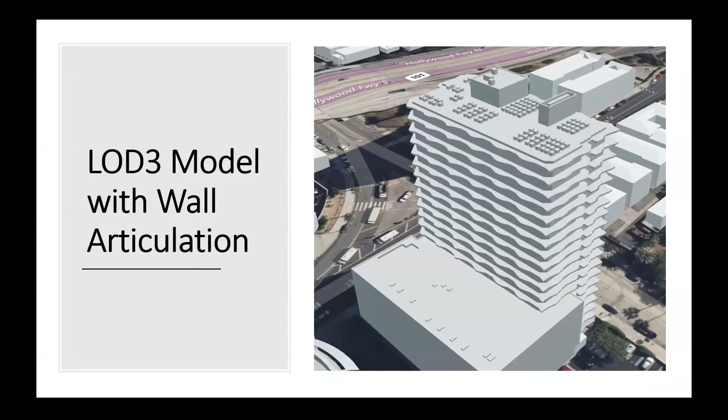These are the buildings with walls articulated, greater information, more detail, more ability to utilize those in more detailed scenes.

And then, of course, the 3.5s, which are textured buildings with computer matching image skins, as well as real photographs of the actual billboards and, in this case, the business information on the buildings themselves. And I just talked a little bit about the oblique image capture and 3D modeling, which you saw.

And then, of course, LOD 4s, where you reminded me that I wasn't really showing anything. Those are LOD 4 buildings. This is the Salesforce building. Just lots of materials, lots of polygons, definitely streamable over the web, but you got to watch what you're doing when you're bringing this many files into a web browser environment. You have to optimize the buildings. That's what we do with NextSpace software. And this is a great example of context and an actual building itself.

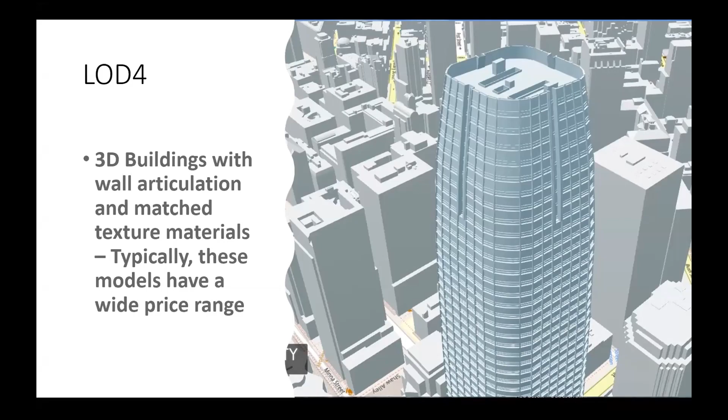Finally, I'll show a building with interior modeling, which is a project we're currently working on, where you can actually go inside the buildings and interact. Mark Thomas is available now to give a little presentation, and he'll take you inside the buildings with the NextSpace software solution, showing some really good examples. This is really where developers get to benefit, because they get to bring their data into a digital twin platform, not only on the web, but also on rendering apps like Unreal, Omniverse, and Unity.

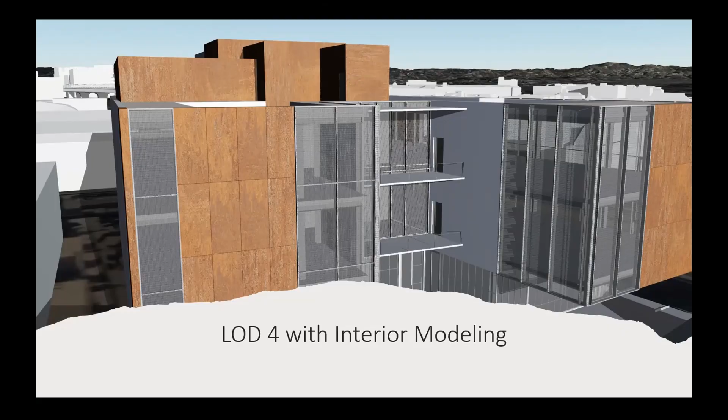Quick summary: LOD 2.5s mainly for 3D mapping and simulations. LOD 3s are untextured but have wall articulation, more information, better context, and better viewability. Textured buildings are ideal for a host of different applications, because you can really learn more about the buildings and have a better visualization.

Obliques we talked about for scaling, if you have to do a large number of buildings that are textured, maybe 1,000. And computer photo-textured buildings, which are the buildings I just showed you, are higher resolution, sometimes taken with ground photography, a little more effort, but very pleasing to the eye and applicable for a number of applications.

And of course, LOD 4, which is the highest quality, where you can actually go inside the building and interact in different ways, because you have the full model created.

This is the workflow. I'm not going to walk you through this now, but if anybody wants information on how these buildings are created, I can provide that. It's basically our patented process that semi-automatically models stereo image inputs into building outputs.

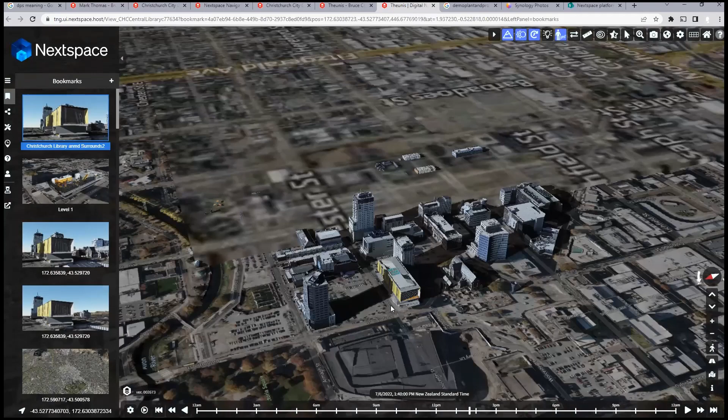So I'll just share my screen here. One moment. Is everyone able to see my screen? Yes, excellent. So we're looking at, in this case, a model which is a full geospatial model.

We're actually looking at a part of New Zealand in this case. We have examples around the world, but I'll use this one as a familiar one. This was part of Christchurch, where there was a big reconstruction process going on after a very bad earthquake here, and the whole city was reconstructed. So there were many things going on. We were integrating geospatial data with BIM data, with new building data, with scan data, looking at the city prior to the earthquake and after, and the devastation and so forth. And as part of this program was a new library that was built, and this was a very detailed BIM model.

And so we can zoom in here. We've got these bookmarks. So what we're looking at here is the NextSpace visualization tool. What NextSpace provides is, first and foremost, nothing to do with visuals, but the pure database that sits underneath the digital twin. It's a structured way to represent all information, whether GIS data, BIM data, or scan data, and we'll explain that as we go through.

So we're able to look at a digital twin simultaneously in a connected way across Cesium, Unreal, Epic Games. There are people working on Unity as well. The way we do it is we work to bring all information into a data model, and then figure out what things look like, and then present the appropriate graphics in that visualization front end.

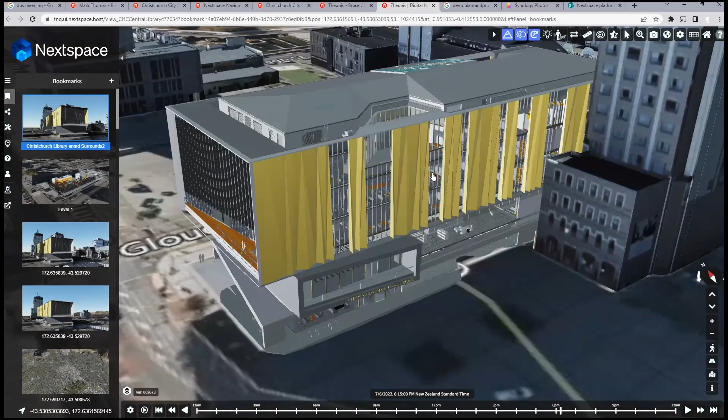So if we zoom in here, we'll come down to this building, and this has been imported from an IFC file, but there are importers from Navisworks, Revit, SketchUp, IFC and so forth. We have control over shadows in the city, and we can turn those shadows off, and we'll see we have LOD3 models. Some of these models have data, so everything is database.

So when I click on a building or an object in a building, we go and see that we have a complete data schema behind this.

We have a lot of tools that will merge data schemas, so you might have data coming in from different contractors and subcontractors. We have one concept of a building, we have to map all of that. We have one concept of a window, we have to map the data schemas so they all match the attribute structure we want for a window in a project.

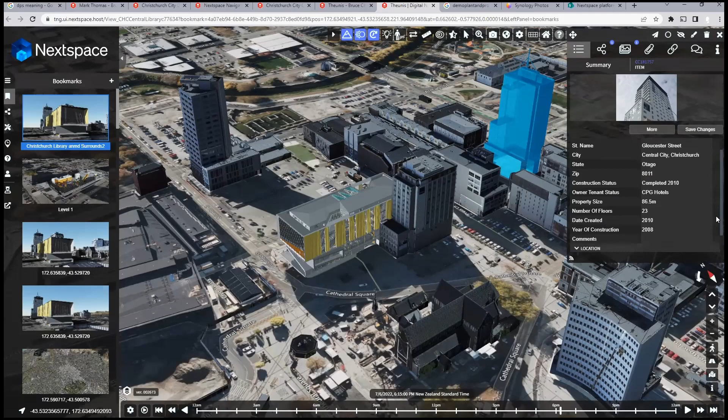So there are many tools there, and we'll show a bit more, but this goes all the way down to a level of detail within a building. So if we come through this building here, we can come around, we'll see we have in fact the full level of detail. I'll just hide this window here, and we'll go inside the building.

Let's click on this decorative tree for the students. We'll see we have all of the information, multiple images, documents, so all of the CAD stuff linked to this actual piece of equipment, all of the BIM data, and we can control how much data is presented from the BIM side of things.

And we can also have custom forms, so we can start telling a whole story about a project or a proposal. We can also adjust all of the attribution to meet the needs of long-term maintenance, so for asset management of the facility over its lifetime, we're going to want to track things as diverse as carbon footprint, energy usage, when was something last maintained, and we're able to actually go and deal with that.

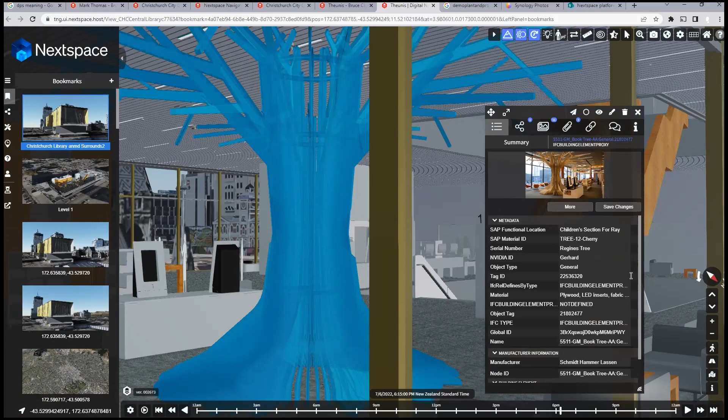So if we go and click on this, we can actually go back to what is the fundamental database of this object, with all of its information. It links back to SAP or to other management or maintenance systems. So it's a collation of BIM data, management data, IoT data, and so forth that goes back.

But as well as having all this rich data, we can add a new attribute to this, which is a new demo or a management attribute.

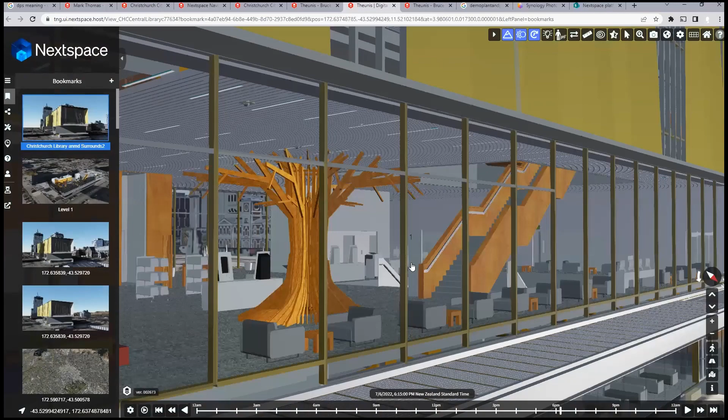But let's go back here, and we can go round to every single item and thing that's fully documented. But we can go one step further than this, and we can do markups.

We might decide that we need to record some information in here, and we'll click, and we have all these sorts of things that we can do. So we can interact and leave markups and save that markup and so forth. But we can add images, we can draw polygons on the ground, markups, we can drag and drop and put new things like cranes or trees, so there's a whole lot of tools that do it.

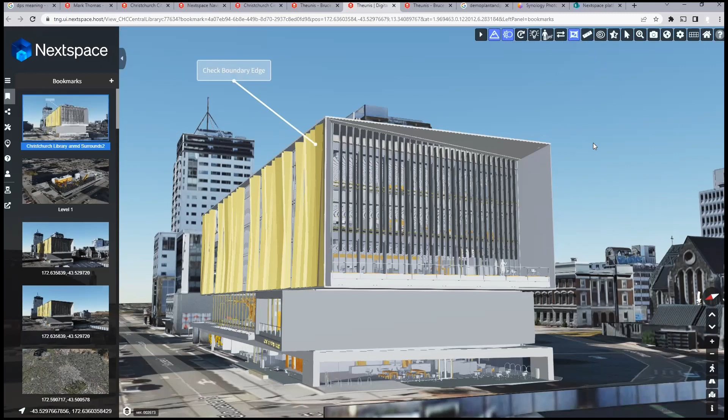But one of the exciting things that Kim mentioned is there's also the ability to export to the Unreal environment, to the Epic Unreal environment. But let's go before we do that, just to show what we mean by the full data side of things. I'm going to go around, and for this demo, we'll actually put some.

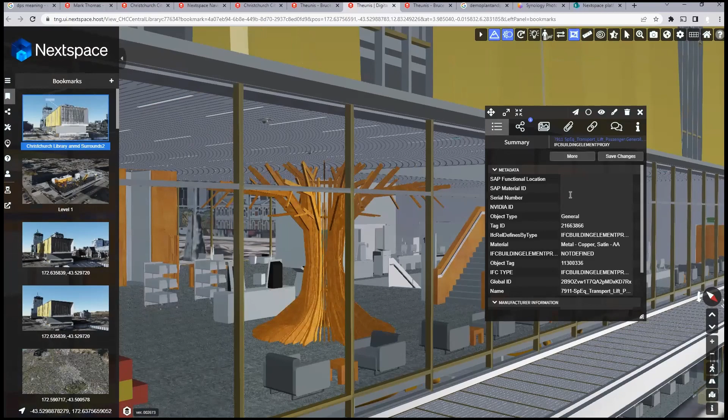We'll take this and say if we want to add, so we want to put the tree. So let's add. So Kevin's, we'll call it Kevin's demo, and we'll save the changes. We could add a new image or picture into here. If I had a picture of Peter, or Kevin, we would put it in here.

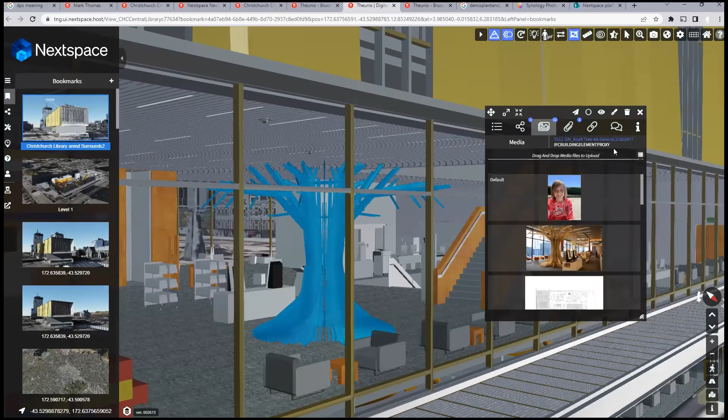And so this is the last person that did this demo. Let's see if I've got a little picture here. We'll pop a picture of someone on, here we are, my grandson. So there's a picture of my grandson, and he's going to play on this tree. So we've saved that. And so now we're going to export, and then that of course could be something more formal, like a plan or a construction plan, an image, a 3D model, some other reference media.

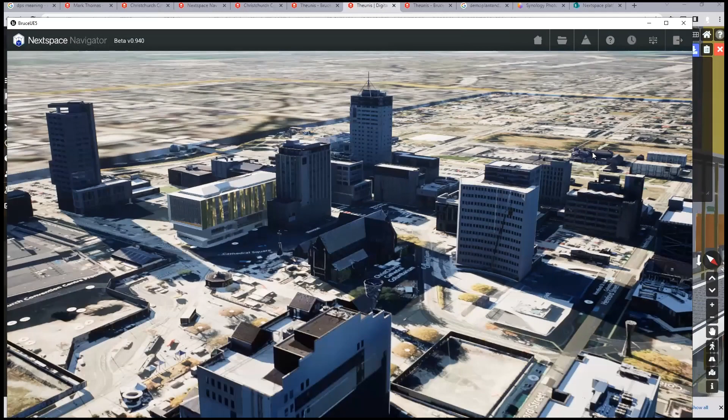So we're going to export that now out to Epic Unreal. I'm going to start that export, and then we click on this, and I've just loaded that. We can do it again quickly, but here it is. So the same model comes up, and we're now in the Epic Unreal. So we have a viewer that we've created using the Epic Unreal environment and the Cesium interface for all of the terrain, and we can get the city, but what's more important is this is a full data model.

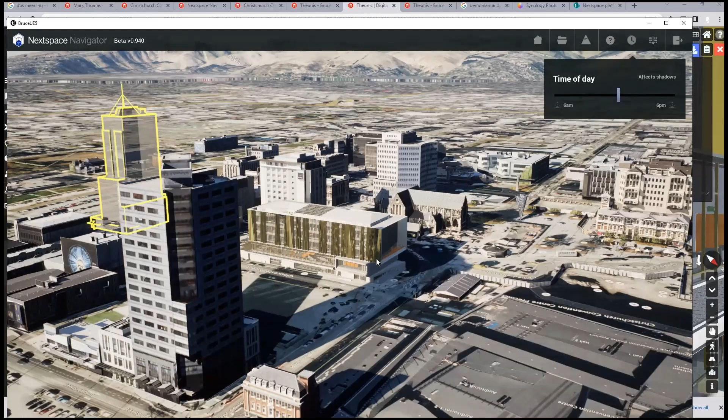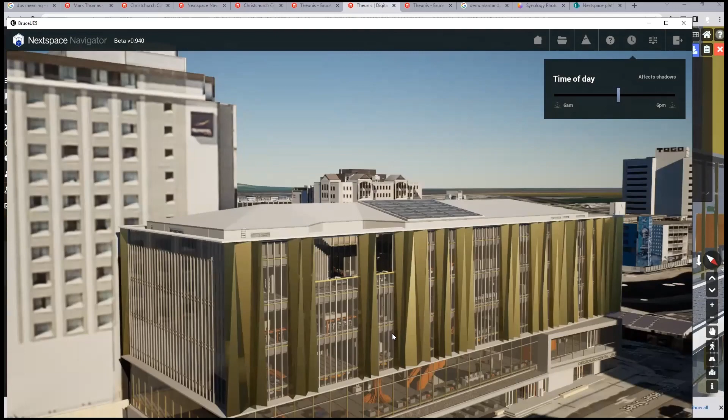So when I click on this building, recall before we saw this data, this is the same model. If we go down into this building, there's that tree in there, and I'm just going to go into navigate mode. So we've got a small change in this navigation, which I've got to learn. And we'll walk through. Excuse me while I relearn our navigation. I'm not a gamer, but we can walk into this building.

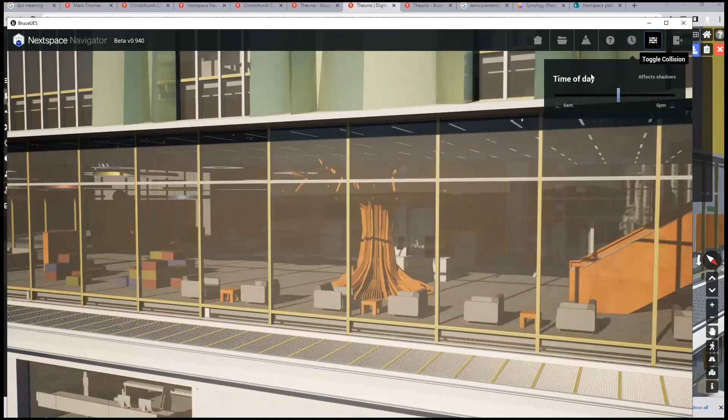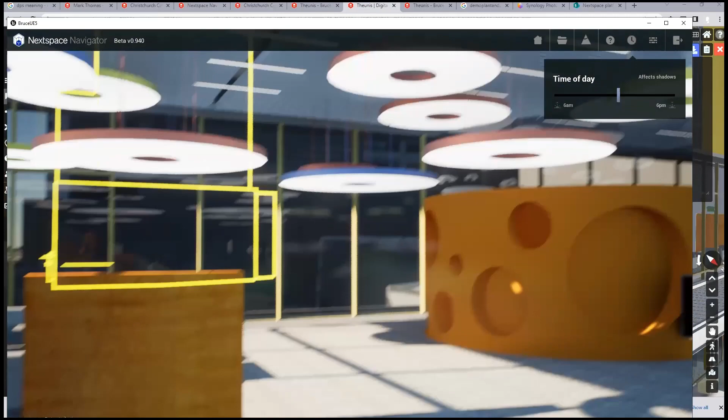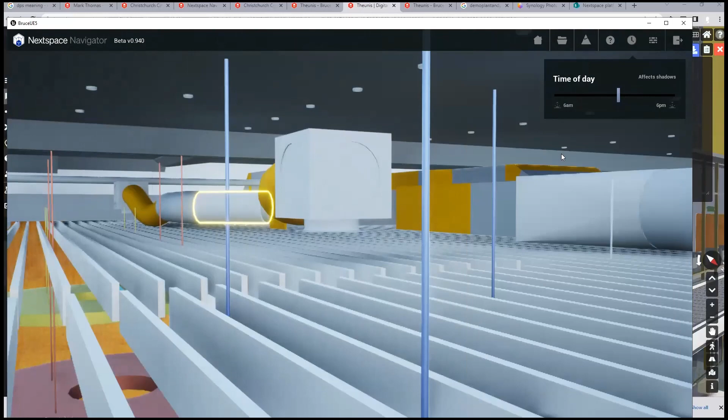So I'm simultaneously seeing data move, and if I open the same model up in the Unreal environment, we can see all the HVAC equipment here. So we can look at the valves and the dimensions. So this is all of the model, without compromise. We can look at the time of day and see the light and the shadow move through here. We can go up and down the stairs, and we can see the outside environment, but everything is data based.

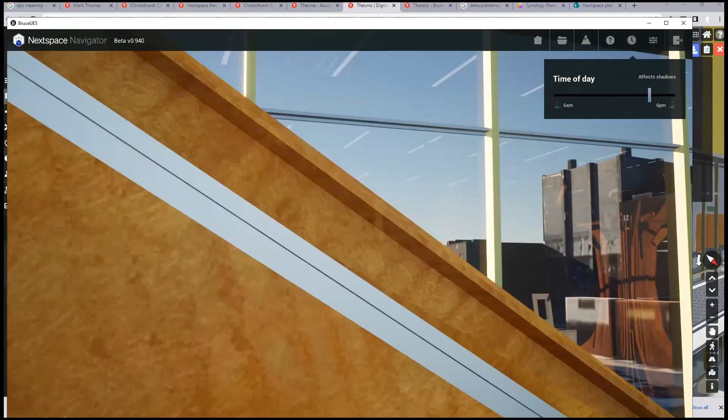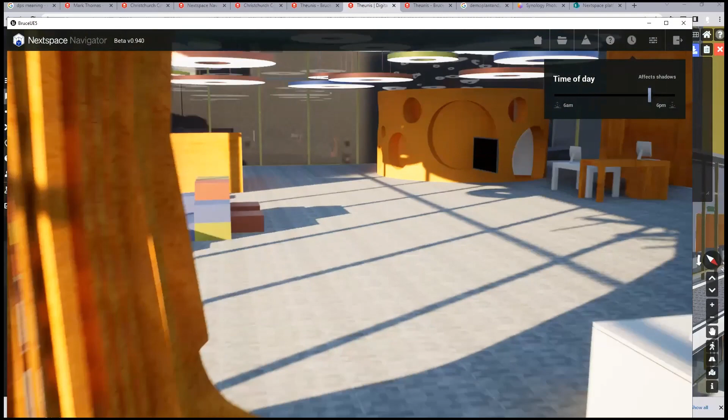And I think if I can intervene while Mark is demoing, this is really sort of a NextSpace superpower, right? You can build up your projects in a GIS environment, and then you can drop them into Unreal Engine and keep all your data that you have. Yes, it's a significant product evolution that I believe will be preparing for the next wave of visualization requirements in the future.

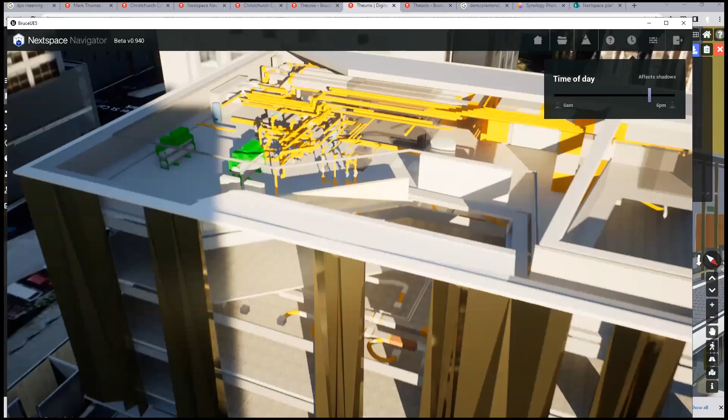And for us, for a city modeling business, we can drop a whole city in there. It's no big deal. We've got Christchurch. We can drop 20,000 buildings in there. So it's really amazing, and that's, to me, something that's truly unique with NextSpace software. Yeah. So on this NextSpace Navigator, are you able to record a video, take screenshots, or is this strictly for the account holder, or are you sharing this link to maybe a client?

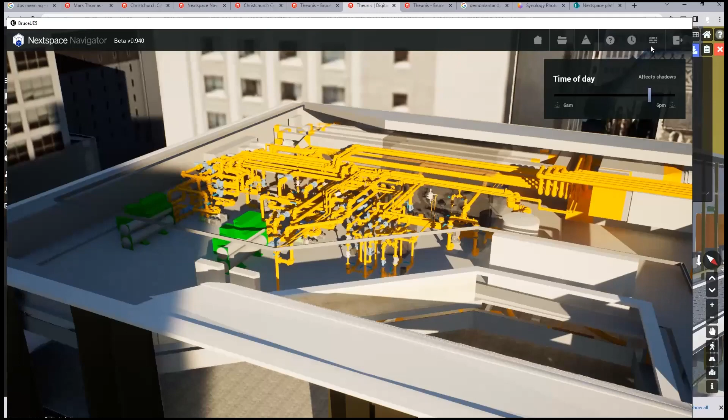So the way that it works, you can take screenshots of course. I'm just going to close down the Epic Unreal. We'll come back. So from here, we don't have videos. We have these bookmarks that we share that record a story of what we're looking at, so we can open up just this view, and that controls what's on or off and so forth. And I can share this to anyone at all by clicking on this link here, and it will take someone to this specific view.

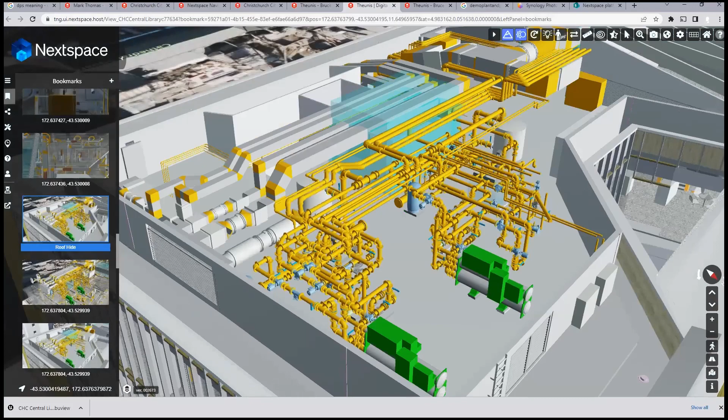So this will take us back inside the view, and to a markup. It'll take us to a view of the roof hidden, and remember that. And so at any stage we can stop and take a screenshot of that. We don't have a video capture yet. That will come in the new release. There's a whole new user interface that's been released, which has a few more features and is lovely and easy to use.

It's kind of like a geospatial PowerPoint, but it's 3D, it's interactive, it's geospatial. If I have a license to operate this, we can add all the markups and callouts and add our own images, draw the lines. We can do measurements and markup and so forth. And so we can get into any level of detail, mark it up and mix that information together. Does that answer the question, Tony?

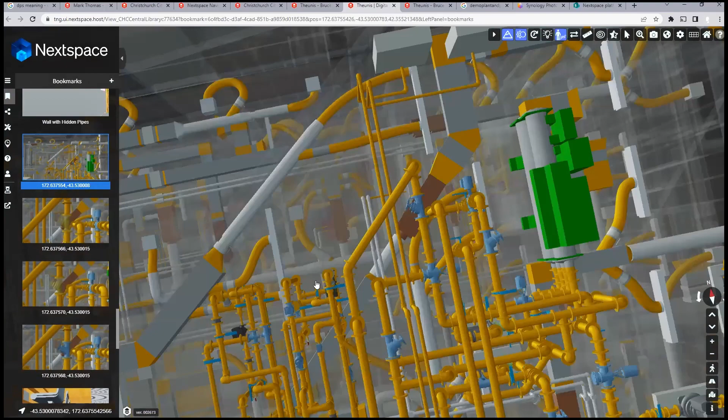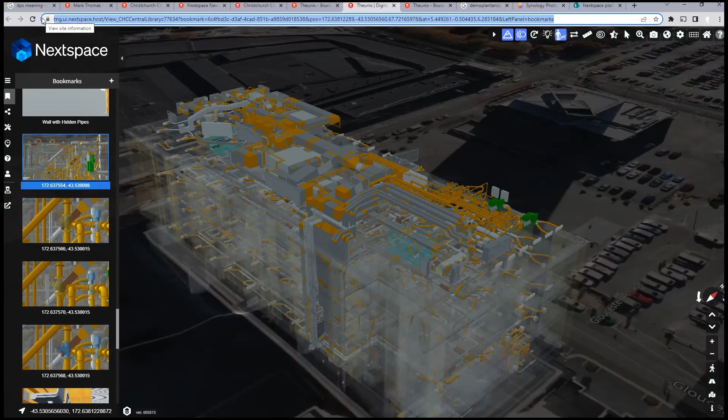Yes. And is it just one file format you can bring in? I saw you mentioned IFC. Is there any other kind of file formats you can import in? Oh yes, there's a whole range: IFC, Revit, Navisworks, SketchUp, FBX, there's GeoJSON for GIS files, KML, there's LAS, you can have all your point clouds. I'll do an example. Nextspace is essentially open architecture, Tony. Okay, pretty much all the GIS file formats.

Yeah, there's always some format that you're going to have to convert, and there's always requirements. Cesium has its own rules. Unreal has its own rules. Omniverse has their formats. Mixing and matching is why being open architecture is always a challenge when you're dealing with a lot of systems that are kind of open but not totally open. So we're always evolving, let's just say. We have the tools that bring together data of a tremendous number of different formats, either directly or using tools like QGIS or ArcGIS itself, or the translators. But largely we cover all of the key types of data,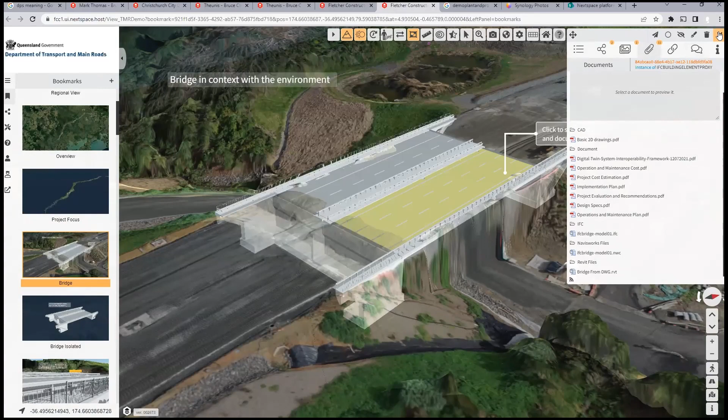geospatial data. So for example, here, this is brought in from LiDAR scans. This is super high resolution LiDAR capture of a project. We can come down into here and we see we have a full bridge, within the landscape that's been scanned. You'll see that high resolution landscape come up, and we have all of the drawings and plans of the project all available directly on the model. We can look at every aspect and development of this. We can isolate the bridge. We can get in close up. We can view bridge construction stages.

And if anyone wants to share this, for example, if I go to this link and copy this, if anyone has a reasonable internet connection and a graphics card, you can click on the link I've just put in the chat and you'll go to the same project. And so we go down. So here's stage 1. You'll see here the project stage 1. I click on it and we see the build phase as 1. If I change that to 2, link to my project management and save it, it will change color, so it's all data driven.

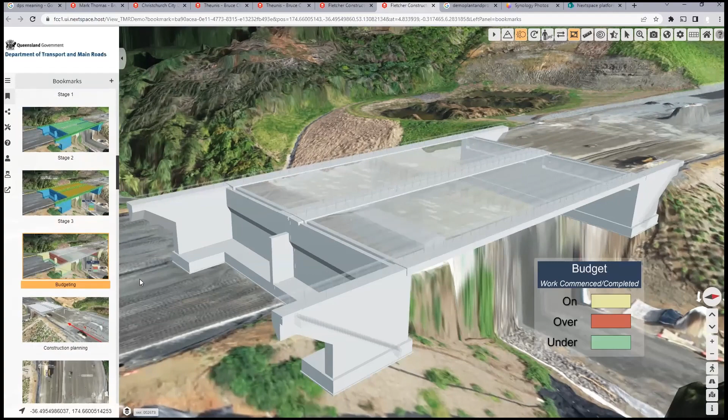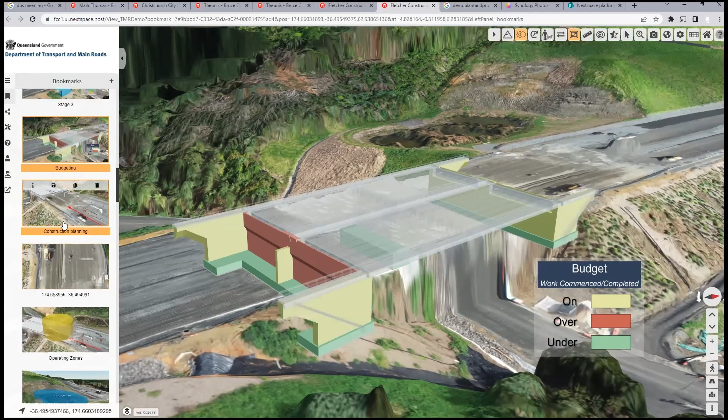I can color my world based on whether things are on budget or off budget, simply by changing the data. And that data can be changed by API or by user interaction. So this is a lot more than BIM data. This is now talking about financial data. So it's an amalgamation of all information about the things of interest within your world. We can do markup and construction planning, and you can go in here and we'll add a new crane, so we can build up symbology libraries and bring those together. You can draw the markups, all of these cones, road markers. We can set up some road markers around, and each one of these will be data based, so they can all be totaled and costed and have their own attribution and so forth.

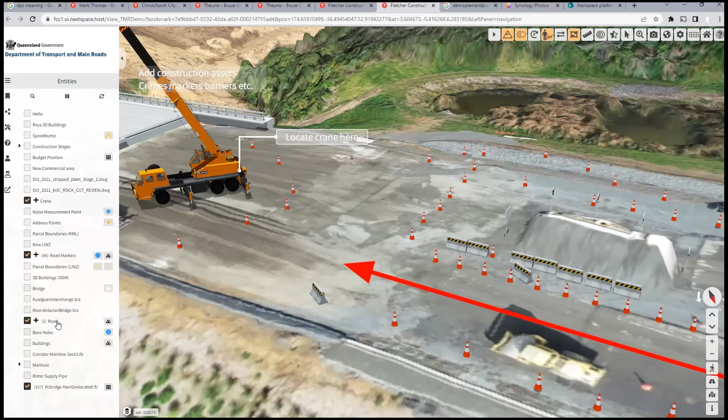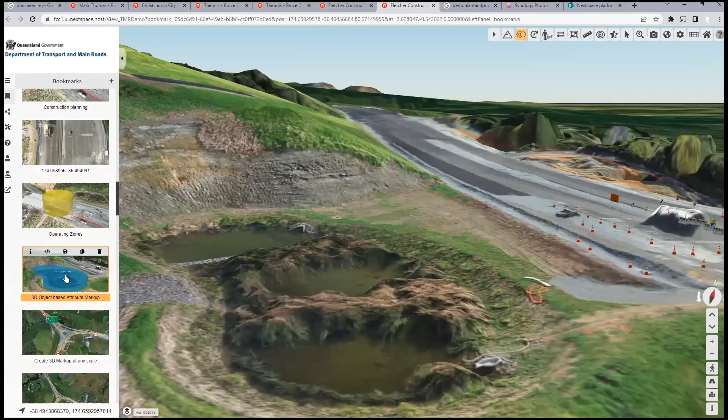So we can look at safety envelopes around the crane. These can be parametric objects that change. We can do the markup directly onto the 3D landscape. So we're mixing in drone footage. We can bring in geospatially located DWG files, of course, a standard file format import. And these can be overlaid, and they're automatically placed in the right position in the world, because we understand all of the geospatial coordinate systems that come with different data. So we can mix and match different projection systems.

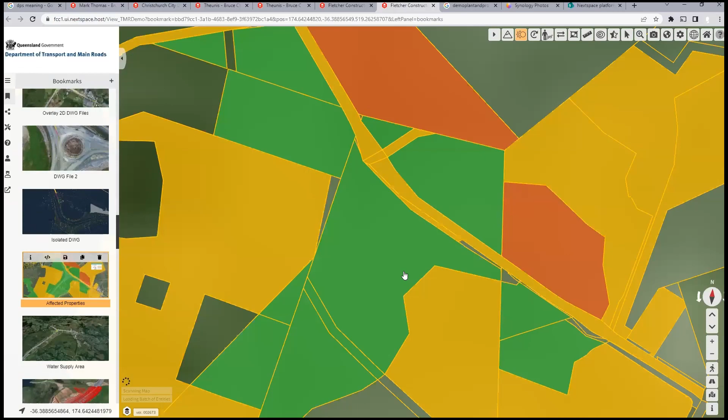We can go in here, we can bring in the data. We can either live link or import from ArcGIS. We can build up data like this, where it's telling us this is under review. This one will say it's approved because it's green, so we're colorizing it based on the actual status of the thing. So compliance, this one's under review, this one's applied, and so forth. So you've got ways to colorize, and you can also go down to a water supply area here.

So we can merge the drawings. We've got the 3D DWG integration, so bring in the DWG. We can automatically draw the contours, the contour mapping for the site. So these are dynamically generated in 3D.

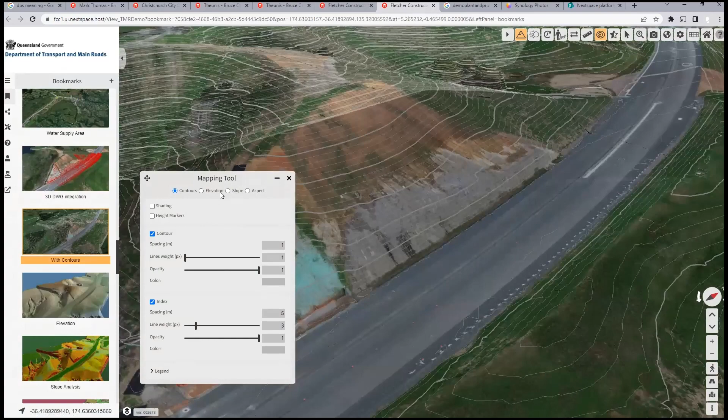We can change the line weight. We can change that to an elevation view. We can change the presets, and change what the values are. Minimum height is, I think that was about 40, 30, 20, and 100. There we go. So we've got all of these tools: elevation, slope analysis, aspect.

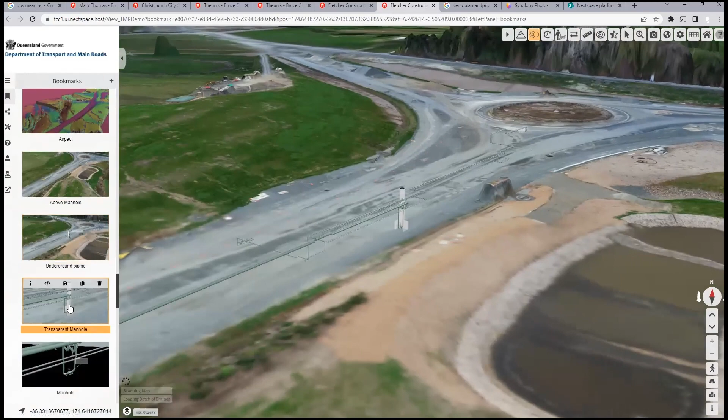We can go in, we can look underground, go down into a manhole, and we come down. And absolutely everything. If I click control, we get the full data on every object in this world, in this scene. And we can jump out to the database of this valve, look at the valve in full detail view in isolation. We can then pop out to another visualization.

We can look at valve to industrial. We can look at relationships, so we can explore. There's a relationship between a valve to an industrial. This valve controls the water flow to here, and this talks about that relationship in terms of pressure ratings, capacity, and so forth of a link. So this is the concept of linking things together through any number of relationships.

So this building sits on this land parcel, is in this state. This floor is in this building, this room is in this floor, this building is connected to this power grid, it's connected to these. So all of these interconnectivities and relationships can be stored within this digital twin model, so you can explore the consequences of changes within that environment.

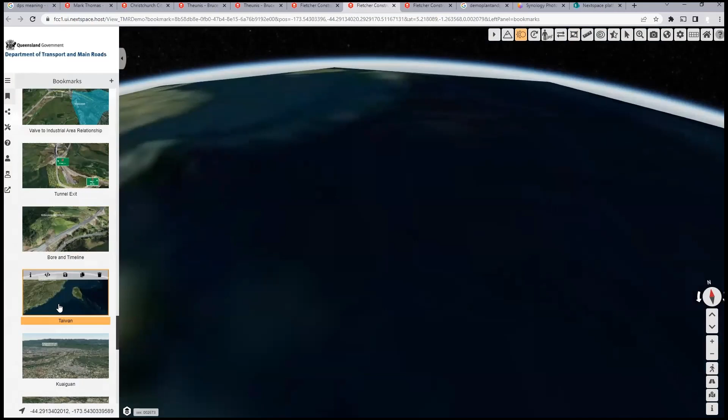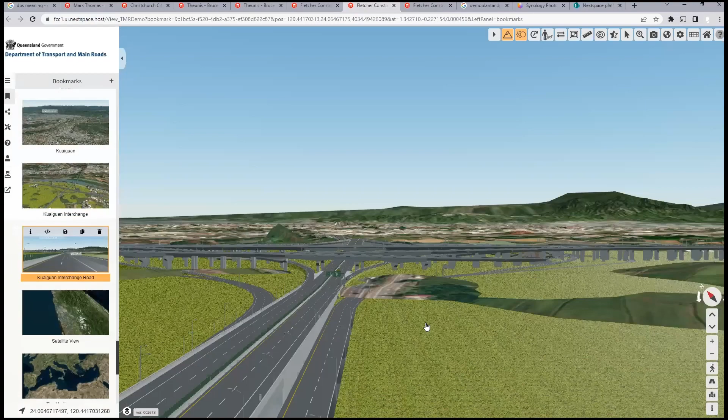So, we come down, bore information, but there's no limit to the scale. We can see we're coming out here, and we're in a project, down here, on the earth, but we can zip across to Taiwan, the same model, and down into a road project, or into that building that you saw before. In this case, we'll go down to a road surface. We click on the road surface.

We might say let's change that to over budget. Kevin's spending too much, and then we can jump out again and say, well, okay, we need to do the presentation of that. So we start the export, and I click on that, and you'll see it just opening up. This is how quick it is to go from a digital twin model here to one in Epic Unreal. We can show some Omniverse if we have time.

And by the way, Tony, just cut me off when everyone's bored or we've finished, because I'm not very good at keeping to time.

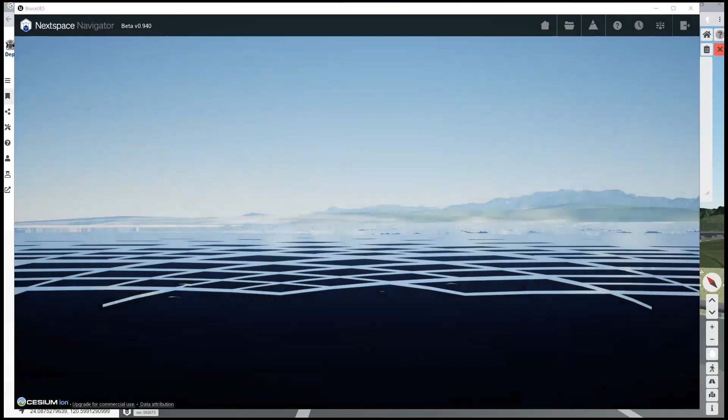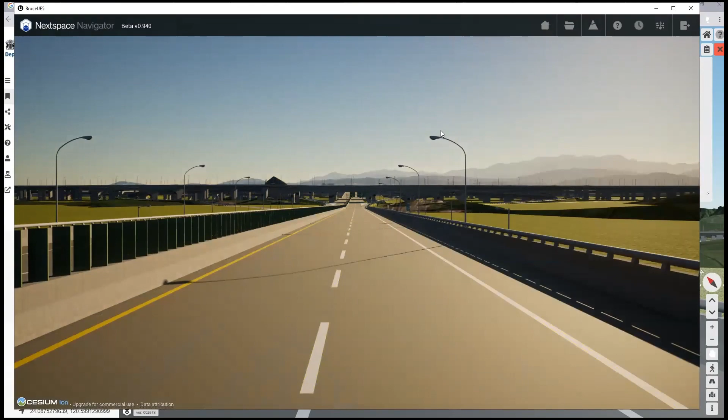But here's the model. We're in Epic Unreal now for the same highway, but we get the same. So this will actually give us the over budget. So it's the same model, but we get the full walkthrough capability, with all the signs and.

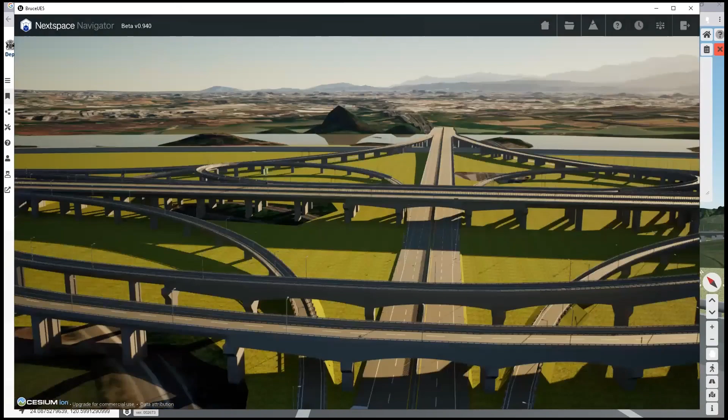That really looks great, Mark. Very cool. Real quick question. When you were doing the utilities, are you able to assign specifications for that part?

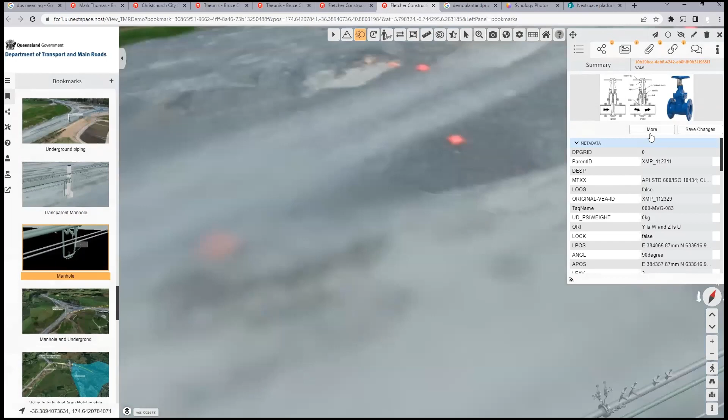Yeah, absolutely. So if we go back, let's go back to this valve, for example. Let's click on the valve, and so if we've already got an attribute structure set up for this, then if we have the appropriate permissions, we can go in and type in here the owner. Let's have a look at something like that.

We just changed the budget, like it was, but if I have administrative privileges and I want to set this up, we can go back and look. This is the thing of entity type valve that's been brought in as part of the piping network. So now when I go into my administrative entities, I look at the entity.

Okay, I'm going to have to jump out in just a second, guys.

But if I go down here, we go to the piping. I think it was piping, was it? BRZ, sorry, I was going to remember. BRZ, or was it IFC?

Oh, I'm sorry, I just got distracted there.

I lost. Well, one of these is the piping and the network. It's now as RVT. So would they assign the specification in here or do it before they export it as IFC? They can do it in either place, Tony. Okay. Sorry, that's right. I apologize, got distracted for a moment. But so this would be if it was piping.

In fact, let's just quickly. It was there, and it was entity type valve, and it was under BRZ piping. So let's have a look. Sorry, I was going blind, and it was valve. And if I go to the data schema in here, if I want to add a new aspect here, which is

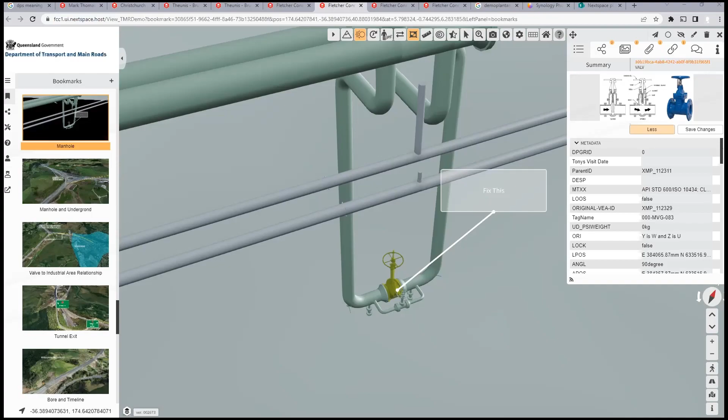What I can do is, Peter's here. He could show another project. Maybe you'd want to see some real world projects. I've got a project that we're working on now, just to give everybody kind of a view of what we're doing. Here's a model. This is using NextSpace software and building out a full 3D digital twin of Hollywood. Oh, let me stop Mark's sharing. Hold on. Okay. There you go. Okay, great. Do you see it?

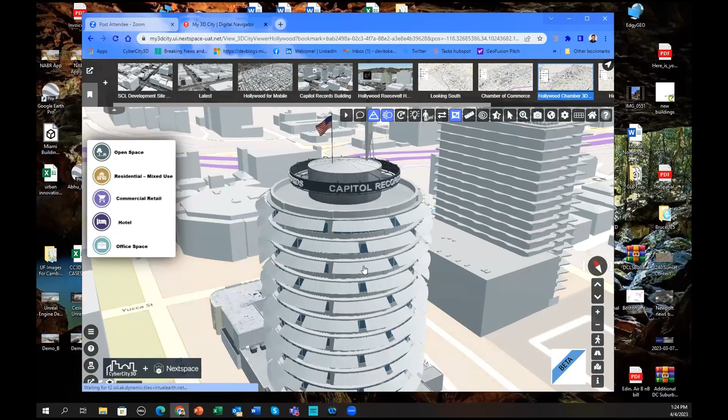Yep. So, this is like a large scalable city model where you can start layering on more and more data. And in this case, each one of these icons represents a new production project that's going on. This was done for the Hollywood Chamber of Commerce. And as you can see, we've integrated all different types of digital twins. For testing, it's sort of a sandbox for additional applications. And we've got LOD4 buildings, like here you've got the Capitol Records Tower. So you can see that you can load in large amounts of data.

And then as this expands and more developers get involved and contribute their data, you're going to end up with these large digital twin cities that are going to be streamed to different users. So that's where I think the market's headed. So users like your group, Tony, would be able to access this kind of data or just stream it for their own projects and then customize it and add different information, different layers.

I mean, we're going to be adding trees soon because you can survey trees just like you can survey buildings. And you can add different image layers. You can do all kinds of real easy functional things via the web. Or if you want to produce a video, you can export all this data out and you can make a video, or you can create a live interaction with Unreal or Omniverse or some of the rendering apps.

So let me ask you this, for this big model, are you kind of coordinating with the city to see if they will provide data to you, like utilities underneath the road, any other things they're willing to share with y'all? They have open data sites. Like Los Angeles has the open data GIS. So you can download all that. I mean, there's literally millions of dollars of data in every city, infrastructure data, vector data, maps. It's unbelievable. LA probably invests 10 million a year in data that you can access and integrate.

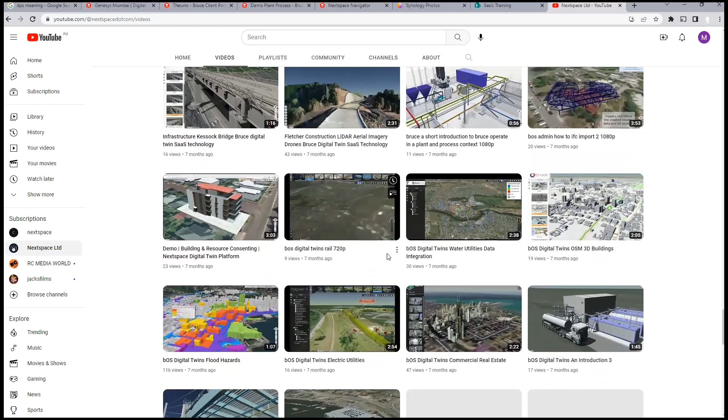We have tools that do linear asset management that will integrate video with where you are on a road or a rail track or a line. But this describes the whole process of loading files, point clouds, photogrammetry meshes, and so forth. NextSpace University Online. Fly mode. Some of these are old, some are new, and there's a whole lot of new user interface coming shortly that makes things even easier to use and read.

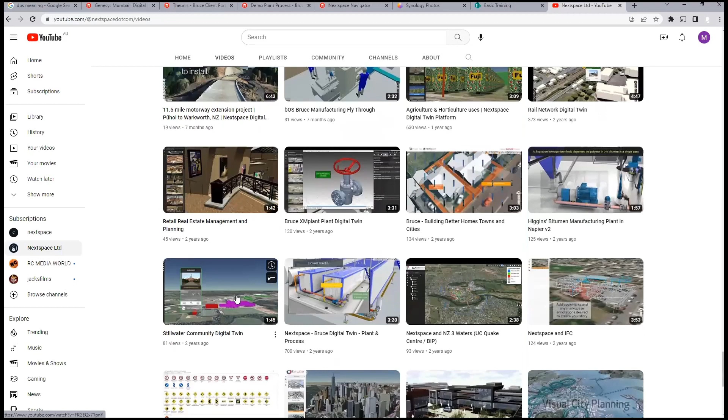But you can see everything here from electric utilities to flood hazards to buildings and agriculture and historical building records to factory planning to mall layout to community digital twins to 3D cities, fly-throughs, visual planning. We have automated AI for reading road signs and documenting them, databasing them. So yeah, any other questions there?

Yeah, I think Matthew asked about the entities. Are entities equal to one BIM model or all the entities within that BIM model? How do you calculate entities in your license? Thank you. Yes. So an entity is a thing that you want to track. If each building is a thing that you want to click on and get data about, then a building is an entity. If every chair in that building is something you want to track, then a chair is an entity.

So generally, to give an idea, in the pricing of the first tier, 50,000 entities is about the size of a pretty comprehensive piping plant. 50,000 individual buildings in a city is quite a lot of buildings to track. So that's the way to think about it. An entity is a thing, and there are tools to collapse up or down the number of entities. If you don't want the full detail of a BIM model, you don't have to have it, but you can.

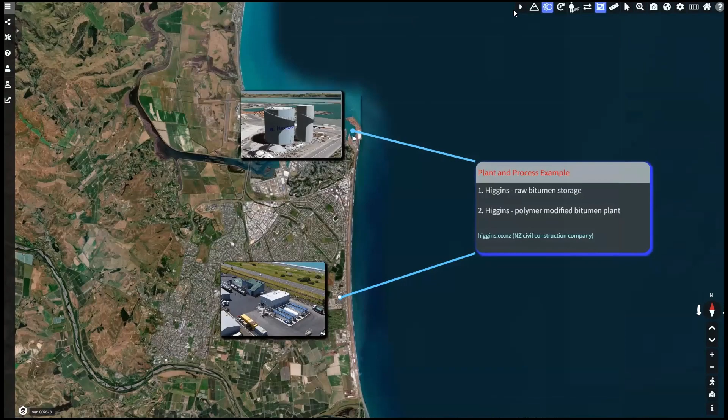With this one here, you can pop out this presentation mode. I'm actually running this on the other screen, so I can go full screen here and run the presentation off screen like this. This becomes something you can link media and so forth with.

So I right click and this will run the media and video, or link us to additional documents and so forth. So the whole thing can be set up to tell quite the story.

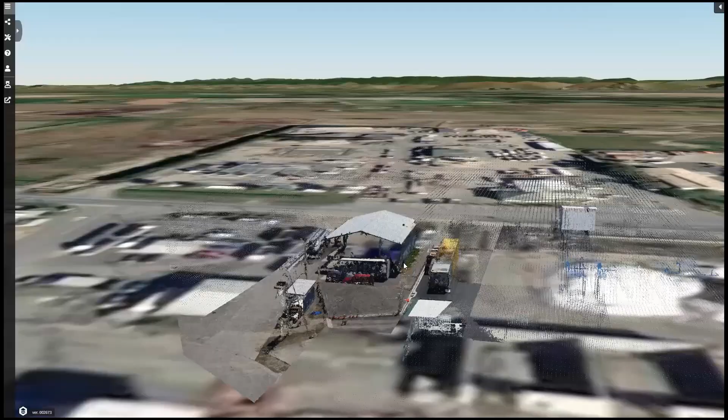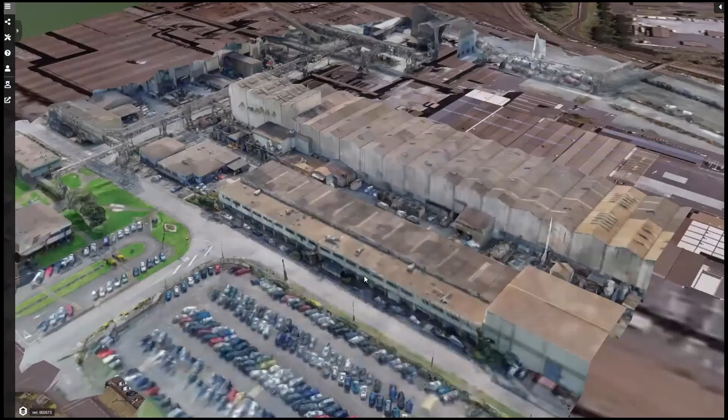So it sort of has a feel of like Google Maps, where you get Street View, some other interactive touch points, but you're still interacting with the 3D model, with all the information on the stadium and all the plans and all that kind of stuff.

So it's a hybrid product, I think, but it's also something that's using, as an open architecture app, a very powerful set of functional applications that can be uniquely integrated for projects, either for a project or for full maintenance. It's very flexible, you can scale it either way.

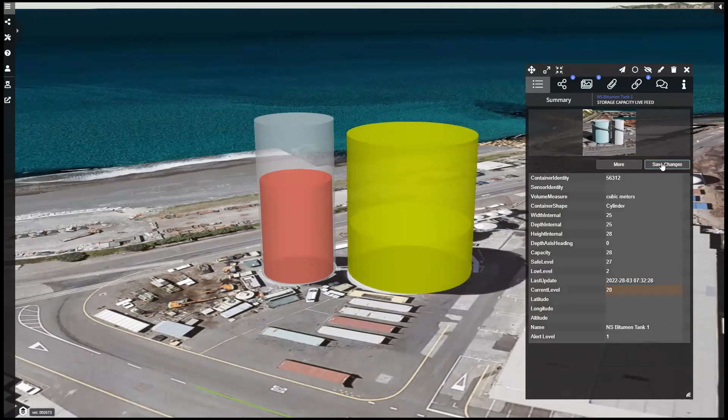Yeah, and you can see it's all data driven. So the level in the tank can be linked to a sensor, which says what's the level in the tank, what's the temperature in the room, and all the silos is captured. It's your data relationships, and that data relationship can keep a record of what's going on, so data driven, but that data relationship exists at a global scale.

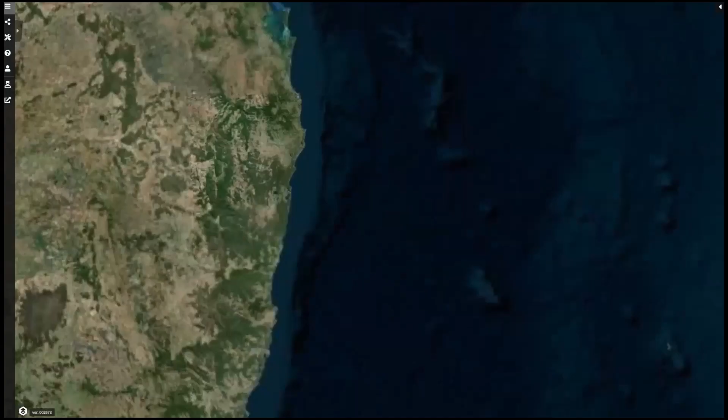And you zoom into the refinery and down to a close-up view in there, to an individual pipe, or maybe you've got work orders. Where's your fire exits? What's the safety? The pump detail that we saw. And so that's helpful right there, where you can pull up kind of details of certain items and stuff like that.

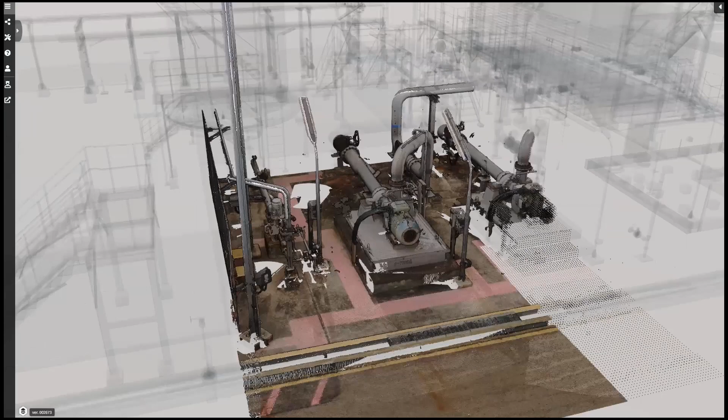So you can mix and match your point cloud scanning, do your measurements, check against as built versus as designed. And we've got the hotspot, you can go in and click on something like this, and we'll see all of the documents. These are all automatically generated right down to the hotspot within the layout, so it's automatically cross-linked with the isometric.

Quick question. So you have a few, I guess, analysis tools. Are y'all going to incorporate something, like if I got a big giant mixed use development, and I'm bringing all this data in, and I need to show a photometric plan of the lighting?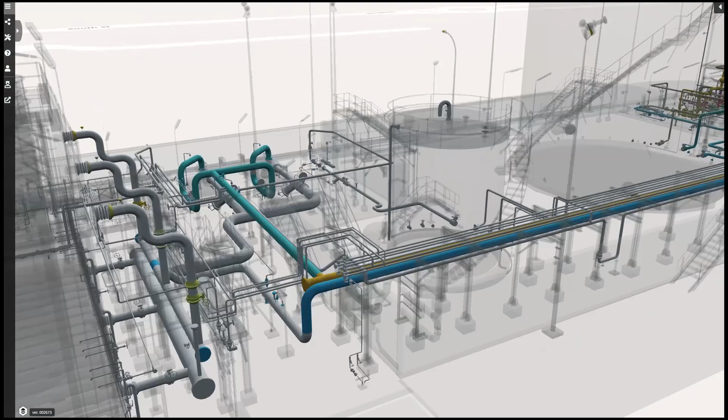Does y'all have any capabilities for that? When you say a photometric plan of lighting, it shows the limits, spacing of the lights per the type of fixture you have in the parking lot, and then shows if it's going to go over to your neighbor's yard. So we have to create sometimes a photometric plan to make sure the lighting covers the parking lot based on shading and shadow casting also. So I don't know if y'all have anything like that.

There's just software out there, independent software that does that. Yeah, it's basic in that sense. If you bring in your, I think it's the IE, there's your profiles, your lighting profiles - potentially they can be models. IEC, what is it?

They can be modeled as transparent geometry, so you can see things like that. But largely we keep analytics fairly simple. Our goal is to provide a coherent data model in terms of data and geometry to analytic systems. We have plug-in tools that do analytics, like figuring out the amount of wall area facing the cardinal directions for solar energy analysis.

We have other people who total up the number of valves and things like that. So we generally give the job of detailed analytics to people who plug into the system, read the data out, and then write the values of that analytics back. We're not experts in all the possible scientific analytic capabilities out there, but our job is to provide very good raw data to simulation and analytic systems, even AI, and then be able to read the results and display them back in the world.

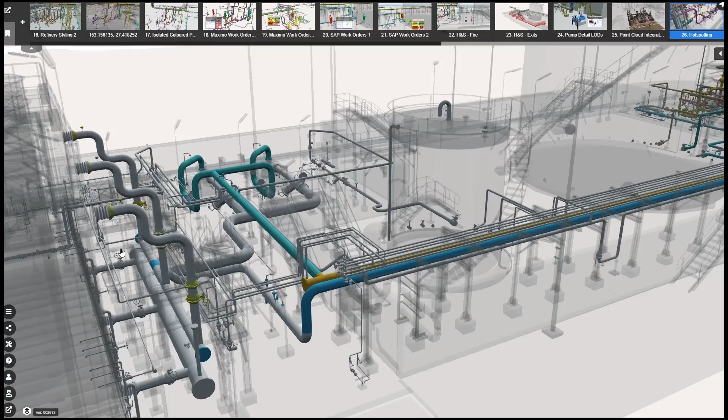We haven't coordinated with FEMA. That would be a really good one, because if you've got your model and you're bringing it in, you really need to bring in the FEMA floodplain data. Yeah, we've got a whole floodplain thing we've done, but not with FEMA - in other countries. And yes, that's exactly what we've done: floodplain analysis. We've been tracking emergency response, flooding, floodplain prone areas, building a little localized emergency response system with it. So yes, it's quite capable of doing a lot of stuff.

I know the users can do it, but that'd be cool if you already had it in your system. I don't know if Esri has it, but the floodplains part is actually reasonably straightforward once you've got the photogrammetric data and the terrain data, because we take in geotiffs. Geotiffs come from scanning, and they're also available in high resolution for local areas. You bring that in, literally drag and drop, and that creates a three-dimensional terrain. Then you simply add the floodplain - it's just a two-minute process to add a floodplain into it, which you can then adjust, control its elevation, and build cuts through.

So it's actually - I was just looking to see whether I had one. There's one that's already been done.

One company, and that's something when we're working on the engine - I'm on the engineering side, and I'm looking at floodplains of waters of the U.S., and also aquifer zones. I download that data and keep basically a database on my own server.

So I'll see with the one - I'm sorry, I wasn't quite prepared, but I'll see if this one of my demos in here has got it. But the guys have moved it around.

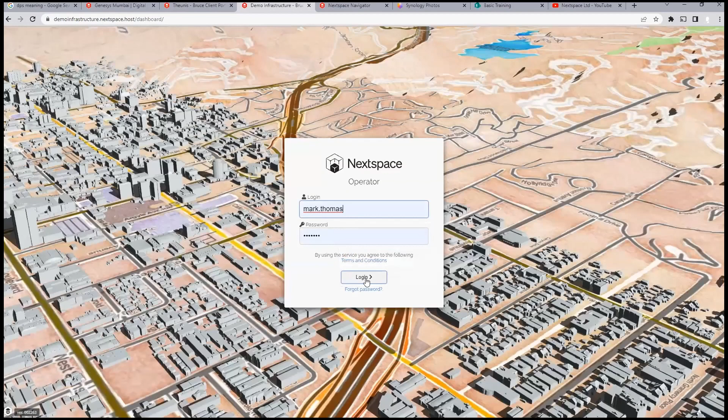Yeah, those types of things can be added, because they're generally in the form of things with attributes and relationships, so being able to put those in - so no, I don't think I've got these demos set up, but this is a great presentation.

I can definitely see the benefits of using this. I'm on the engineering side, so I've been using - you were asking, Kevin I think asked me in the beginning, what were we using for kind of a 3D presentation BIM, and I use...

InfraWorks to do simple models, and so - just one second, somebody was asking to come online. And so I use InfraWorks.

I'll download all the GIS data from the city, zoning maps, and then bring in some aerials from Esri, and then bring in my 3D models from Civil 3D, and then I'll ask the architect for his Revit models, and bring that in, and put it all together within probably like 2 hours. I have a simple model, but it's more cartoonish - it's not high level like yours is, unless the Revit model is nice, but the rest of the stuff is more cartoonish. It's not quite the level, but it's just to present to the stakeholders, developers, or city council.

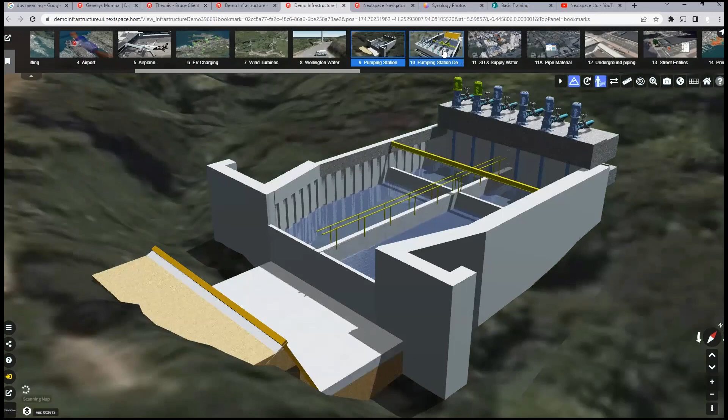So I've just seen it - one of these has got the charging stations, this is down to the wind power and pumping stations, so you can bring in data from plant and process, from your LiDAR, from your photogrammetric data supply, pipe material, underground piping. Let's have a look, I'll see what else is in here.

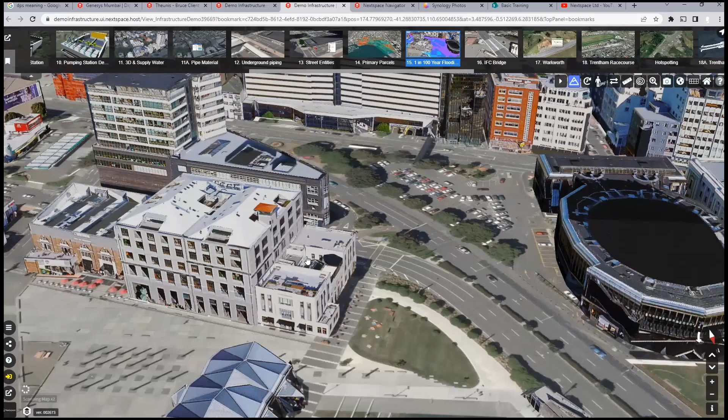Oh yeah, 100-year flooding. It's all been calculated against the accurate terrains in here, and we'll see that all of these floodplains have been brought in.

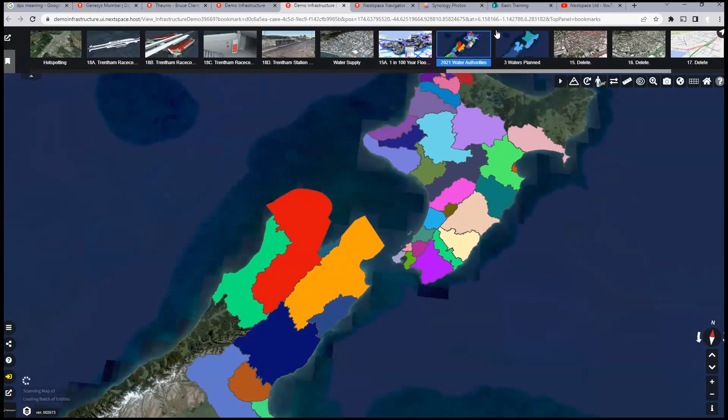Yeah, we accept those. You can upload spreadsheets. You can create almost live updates if you want. If you want to build your own API links and have live data coming in, we're doing that now with solar information on rooftops to get live consumption data for environmental awareness, and just all kinds of applications where we have live data or live document access.

So somebody did post a question on the document link. Does NextSpace manage a document control? So that link is document to an entity, not a duplicate with an outdated document link to a similar entity. Yes, I have to be cautious, that's quite a deep question. Let me answer it in a sort of pedestrian way, which is that the system is designed to link in to an existing document management system, and the documents you see are links. It's a general principle that's really important to note, that we don't seek necessarily to be the single source of truth. You don't necessarily need to copy your data to NextSpace. What we are is a single point of access to all of your existing sources of truth.

It means that you can choose to put data into the NextSpace cloud, which ultimately is on AWS or Vultr or Azure. Or you can leave your data in your existing repositories, be they local or online, and access them with a common view of the data and the geometry and everything through our interface. In the case of a document management system, yes, we can manage documents and store them, and we have basic versioning, but we're not a full-on document management system. If you have a full-on document management system, the documents are actually linked back, and you are seeing the current document in your document management system, and you will only see it if you have the appropriate logins through the API to that system, if that makes sense.

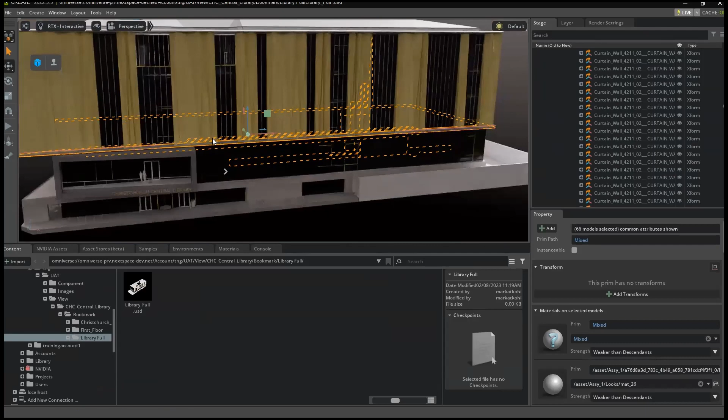Just the final thing. That's your NVIDIA Omniverse version of that library to click in with the NextSpace data. Wow. Oh, that's cool. Yeah, so anyway, you get the idea. It's the same data, and you can render it and find every window and make them glass and so forth. It's probably enough for today, but just to show this, there are multiple ways to look at your digital twin.